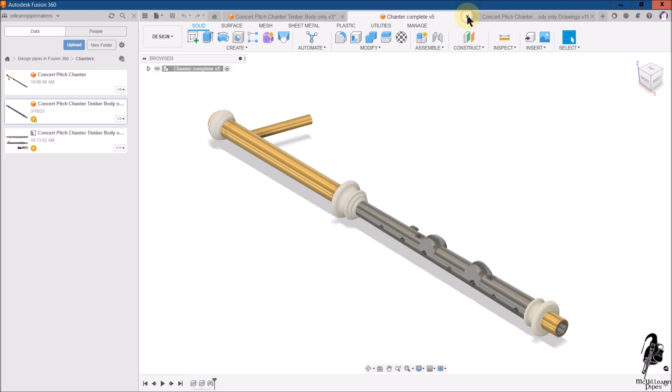So we're not actually going to work with the Wilbert Garvin data. We're going to go to open source data designed on the concert pitch Chanter in the O'Flynn Rowsome plans that are housed with the NPU, and we're going to roughly base the data on those. Here you see one of the drawings. Now the data in the O'Flynn Rowsome plans show tone holes that are not quite circular, and they show a bore which is not a straightforward conical taper, but we're going to ignore that. We're going to go with circular holes roughly based on the dimensions of the NPU plans, and we're going to work with a taper that approximates, is the best word I can use to describe it, that approximates the data as shown in the plans.

So we're going to end up with a design that looks like this. A very simple, straightforward design focusing on the timber body only. We will come back and add in the rest of the components.

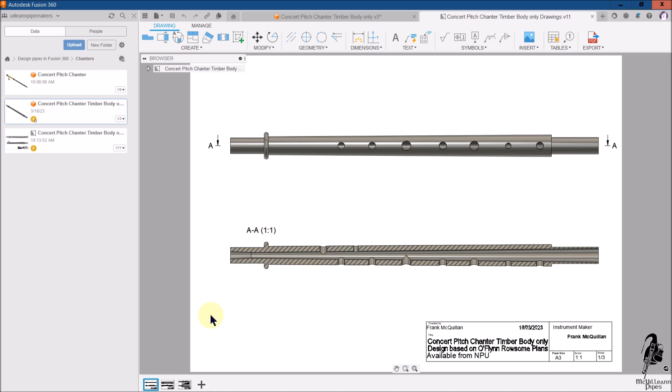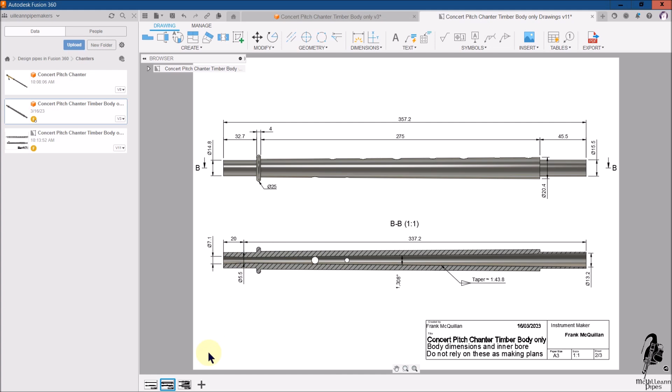And we're going to, once we have the design complete, do 3 drawings. One is just simply an overview. The second one then is, when you fit it back on the screen, the linear dimensions, showing both all the diameters and the lengths and various pieces. And we're going to show as well the inner bore and the reed seat. And finally, we're going to do a drawing showing the locations of the tone holes with respect to the bell end and the diameters of the circular tone holes.

And we're going to do 7 on the front, left hand and right hand, and we're going to do back D, and we're going to put in place a C natural on the basis that if you're making a practice chanter, it's often the habit to put in the C natural hole and plug it with a small piece of cork against future need. Okay, so with that in mind, we'll start off.

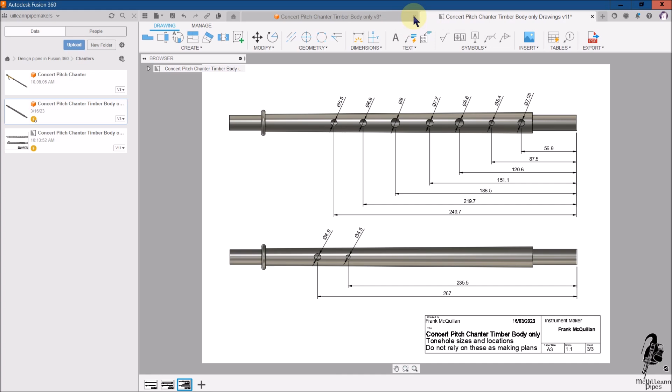So I'll just close that. We'll close that as well. And we will get the data panel out of view. So this is what you should be looking at, or something close to.

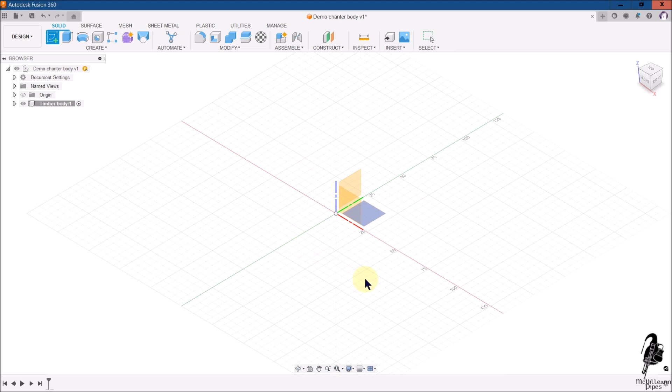Okay, so first thing we want to do now is we want to create a sketch. We want to pick our plane. So depending on where the mouse goes, one or other of the three available planes gets selected. So I'm going to select that one.

Now, if you're unsure as to what plane, just finish sketch. There's nothing in the sketch, but you can see how the sketch now is starting. There is a sketch in existence, it's just nothing in it. So I'm going to just delete it to get rid of it.

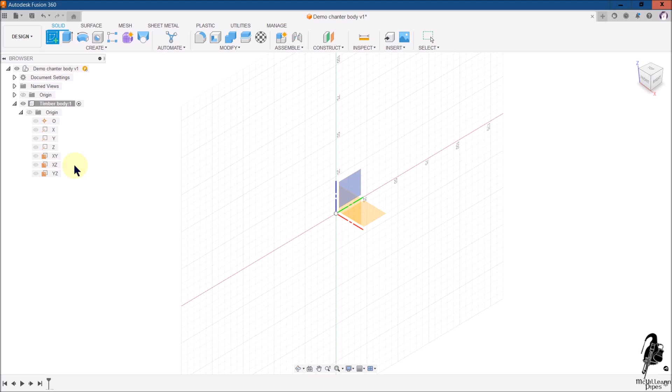And if I want now to create a sketch again, show the origin, you can see that as I highlight each one of these, the sketch becomes slightly, or the plane becomes slightly grayed in the main screen.

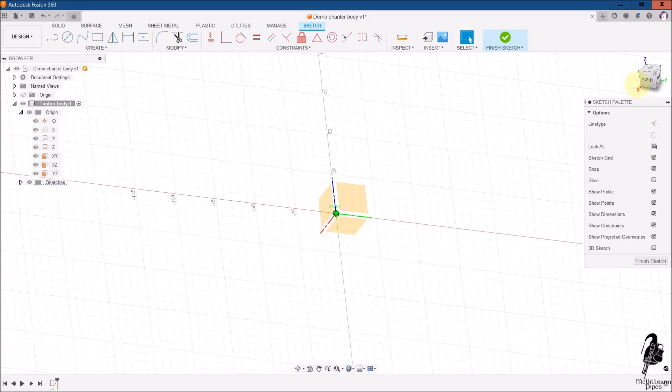So I usually go with the YZ plane. And there you have it. This thing here in the middle is what is known as the origin. You can see you have an axis there, and an axis there, and a plane there. And you can move around with the little cube in the top right hand corner.

But for the purposes of working with chanters, so much of the work we do is circular on the YZ plane and linear on the x-axis, that it's good to look at the actual workspace square on.

So we're going to build a circle. This is going to be the reed end of the chanter, the very top of the chanter that you'll bury into the cap when you start playing it. The dimensions for this is 14.8 millimeters.

So we've just created a circle. This is your sketch palette over here. Finish the sketch, and you can see the way it turns nicely.

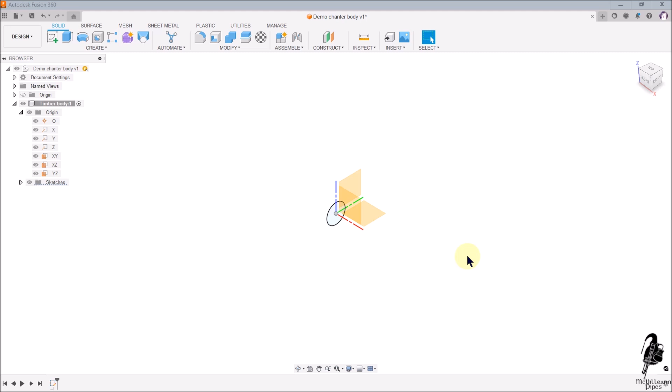So the next thing we're going to do, if you haven't met it before, is this chap here, which in the notes is create extrude. Now the shortcut key is just to hit the letter E on the keyboard, but because we have just created a circle, Fusion figures out that we want to extrude or extend that circle.

So this is going to form the neck of the chanter that's going to be buried up into the cap, and you take a view as to what length you want that to be. So you can see the numbers here. I'm going to type 25.

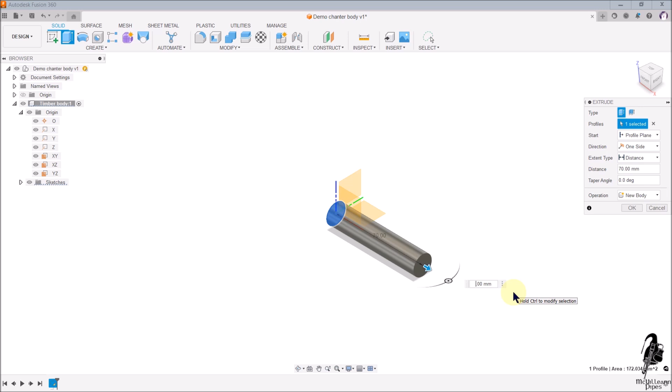I've lost focus there, so just delete that. 25 millimeters, and you can see it has shrunk back to the proper distance. It's showing the number there, and it's showing a number there.

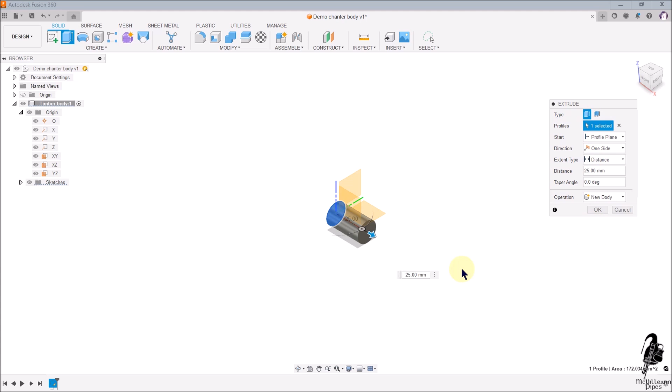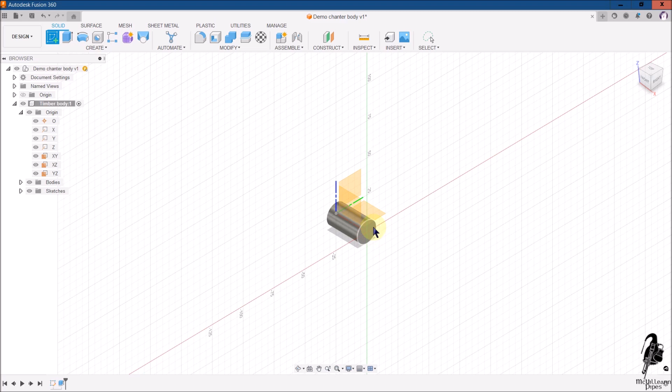Now, we want to put a little bit of a stopper, I call it, at the bottom of the neck. And we do a very simple one. Go back and we create a sketch, and we actually use this face as the construction plane. This practice can cause you trouble later on, because whatever you put onto that face, if you change the length of the extrusion, it will travel with it. So you need to be aware of that in other projects.

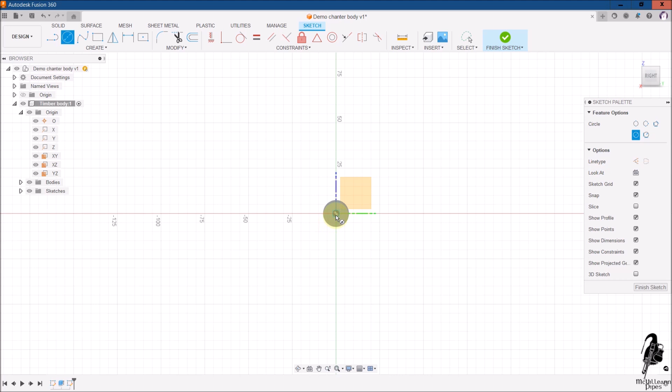We're going to go with another circle. Now make sure you get the cursor onto the center. And if you look closely, as you come towards the origin, you'll see you get a little blue square. That lets you know you're on the center.

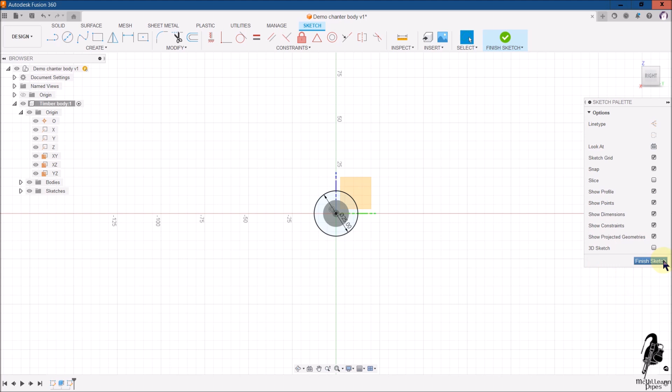What size do we want this? Well, I go with 25 because it's a round number. It's as much an aesthetic decision as an engineering decision. It's just there to give you a resting shoulder that'll stop the cap sliding down entirely over the chanter. So finish the sketch.

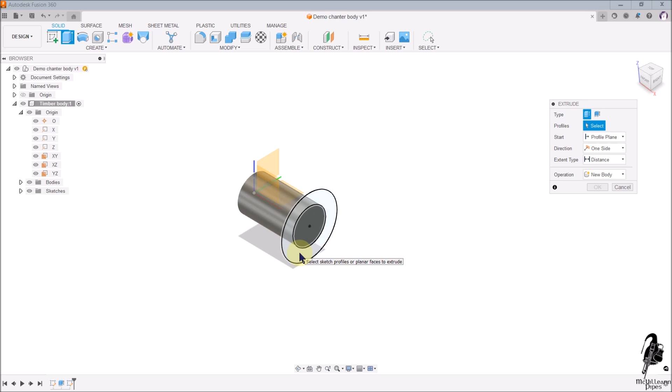Now we're going to have to give that a little bit of thickness, and we're going to use the extrude again. Now you need to be careful here, because extrude or Fusion will recognize that there's actually two profiles in there, that one and that one. So an inner circle and an outer hoop. So we want both.

Now you don't have to hold down control there. A click on one, then followed by a click on the other will give you both. And then we proceed, we want to go in that direction. Now I picked a distance of 4 millimeters for that. Not the prettiest thing in the world, but we'll come back later on and make it pretty.

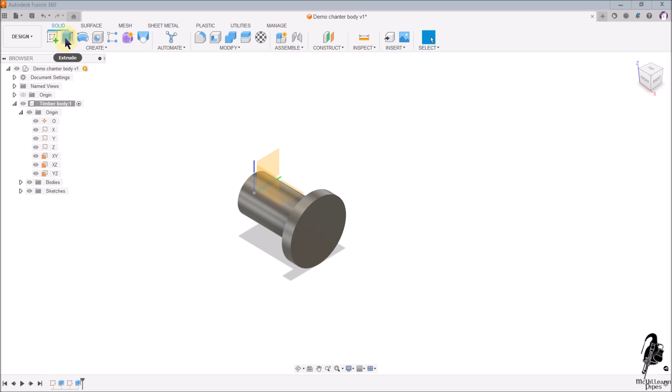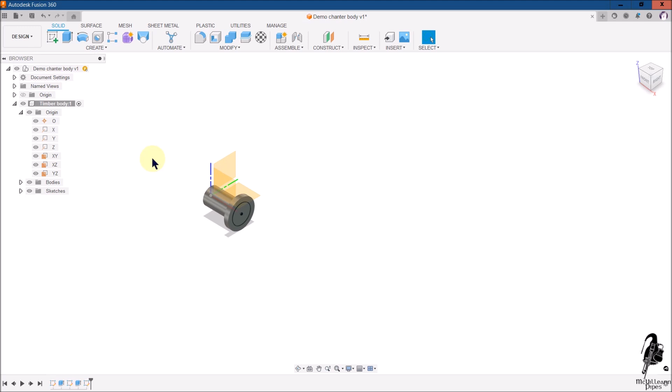Now, again, we're going to create a new sketch, and we're going to take this face as our construction plane. We'll make a new circle. Now we're going to go back and rely on the data we have from the NPU, and we're going to pick 17 millimeters for this circle. We'll finish that sketch. Now we're not going to extrude that circle.

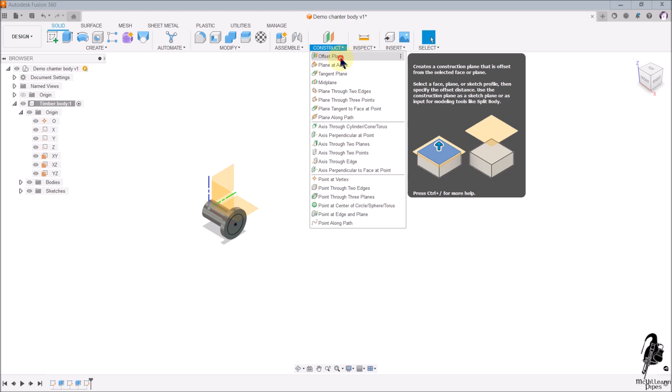We're going to do something entirely different with it. We're going to build two offset planes, and we're going to offset them off this plane here, which is the YZ plane. See the YZ on the left? That turns blue when I highlight that plane. So I'm going to construct an offset plane. I'm going to pick that plane. Now I'm going to put in another plane, which is 357.2 millimeters away from that.

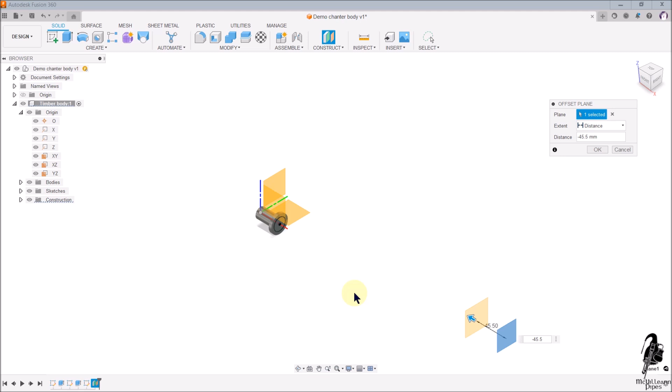And that gives us the full length of the chanter to be. That's the design length of the entire chanter. But I'm going to need another construction plane, and I'm going to use this as my offset plane. I'm going to say, right, construct an offset plane, and I'm just going to go back. This is going to give me the distance, or the point at which the external taper of the chanter ends and the reinforcing ferrule begins. So I'm going to make it 45.5. No, you'll make this mistake heaps of times as well. I left out the minus. So there it is.

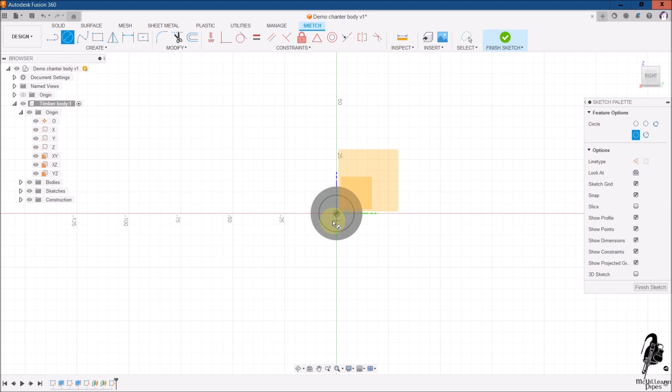So I'm going to construct now the tapered external body from that circle here to that plane there. So to do that, I need to create a sketch on that plane. Okay, so now go for the circle. It looks as if it's all going on top of itself, but it's not. This circle will actually go on that plane, which is negative 45.5 from the bell end of the chanter. It's often a good idea to make the circle real big, way bigger than it's actually going to be before you type in the numbers.

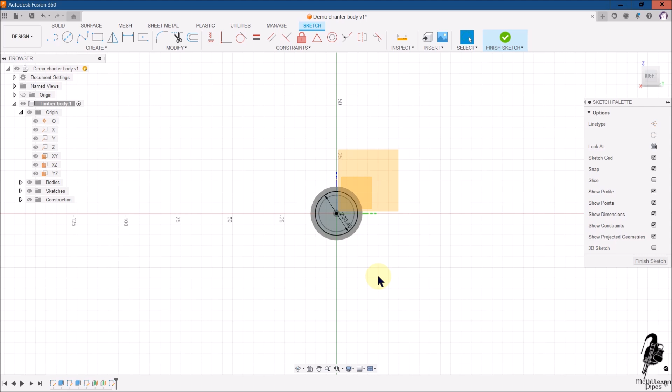And the numbers for this are 20.4. This is purely a matter of aesthetics for you. This is the external taper of the chanter. It will have some effect on the chimney depth of your final design. For the moment, 20.4 is going with the plan, and we'll finish the sketch. We'll just take a look at everything now, and you can see the way that this circle is well away now from this one. So we now need to build the body between that circle and this one.

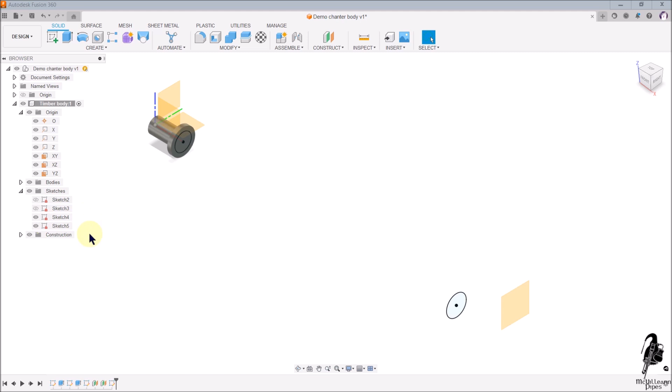And the way we do that, well, firstly, we want to make sure that those sketches are visible. You might have this situation and you can't see anything. And if they're not made visible, you can't get at them. So when you're going to do a loft, it's important to make sure that the sketches are actually visible. And we're going to create a loft.

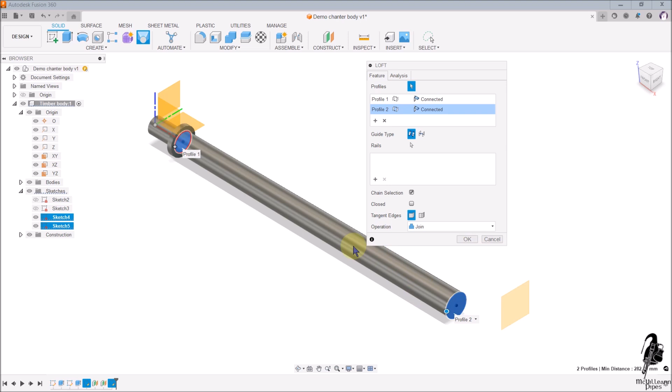And up comes the dialog box, inviting us to pick the profiles we want. That lad - so we got him. We have success, he turned blue. And we have this one. And now you have a loft created between the two. It's important to pick the operation join. There are other ones available, we will use them later on, but for this one, we want it to join. That makes this loft part of the overall body that we're building. Hit OK.

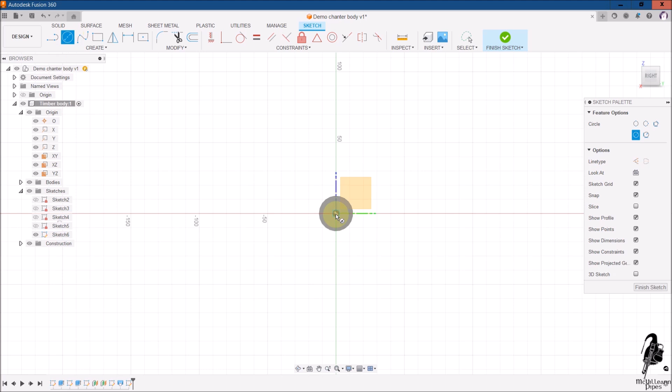So you can see the chanter starting to come together. Just move on again. Now, on this construction plane, we're going to create a circle, this time I went with 15.5, which is a little bit bigger than the NPU plan, but it leaves more material in the finished chanter, and we'll finish that sketch.

You can see we have the new circle here. Now we're going to grow this into a cylinder back to this point, and we're going to use extrude to do that. We're going to convince it to go that way. Now we know that the distance is 45.5, but we might decide to change that at a later stage, and we don't want to put a parameter in here that locks our extrusion to 45.5. So we want it to go to the object.

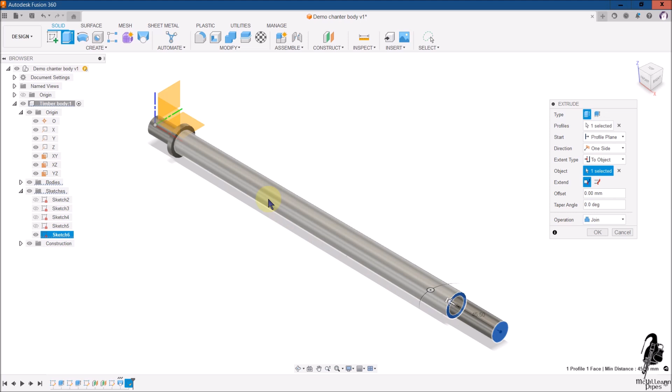And object is selected in the dialog box. The arrow is pointing away here. This is the object. Now it knows currently that it's 45.5, if you can see that on the screen. But it knows it now is bound forever, so that anytime we change where that plane is, change the length of that loft, the length of this will change as well. Save you all sorts of grief in the future.

Now you can see we have the external body. So next thing we want to do is we want to tidy up this lad here. Oh, let's just have a look at him.

Now the simplest way to tidy this chap up, there's several ways for building ornamentation in Fusion. We created a circle and we just extruded it. That gives us a cylinder, and we're going to modify that cylinder with a fillet. Now if you can't see the fillet in your icons, go to modify, it'll be down here. And likewise, if you wanted to use a quick shortcut, you can use the letter F.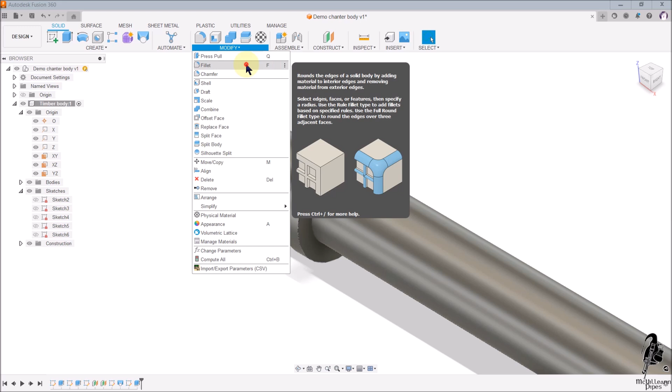We'll go with fillet. Now you don't have to do them one at a time. You can pick a wodge of them together. So we'll select that edge and we'll select that edge. Again, you don't have to hold down shift. It asks you what dimension you want. Now I'm going to break this. I'm going to call it 2.5. Oh, it did it. Shouldn't have done it. I would expect that to throw an error, but I'll just go back to 2.

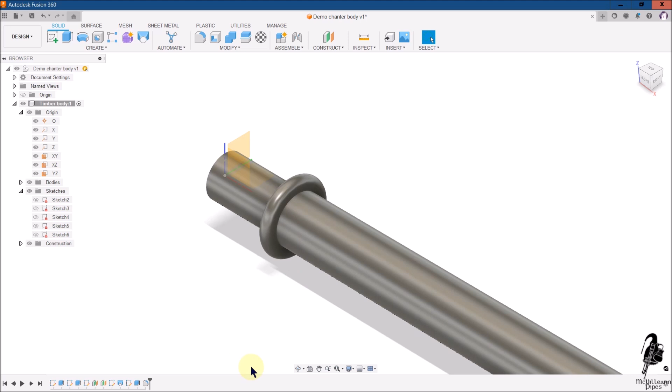Because it's 4 mil in depth, when you put in a fillet of 2, you actually turn the outside of the cylinder into a semicircle. You get a nice hoop effect. Okay, other ways for doing it, but that's a simple way for today. So where are we now? Just have a view of everything. So you've now completed the Chanter body timber solid. Now you won't get much music out of it until we do a few other things with it.

And the first thing we're going to do is we're going to put in the inner bore. Now we're going to take a very simple approach to that. We're going to put in an entry hole up here for the reed seat. We're going to put an ending circle for the reed seat, which is the narrowest point of the inner bore, and then we're going to put a circle in here at the bell end. And you can do this in any order you like.

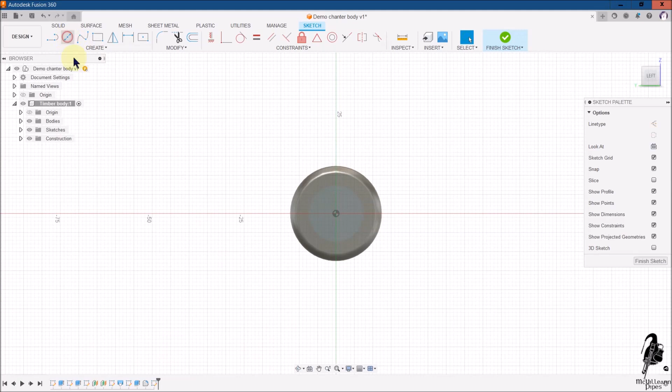I'm just going to start off now as we did it in the instructions, and I'm going to zero in here. If you don't like these things, just hide the origin. They're still available, but they're hidden for the moment. And we're going to put in a circle on that face. And that circle is going to be the opening diameter of the reed seat, and a 7.1. We finish the sketch.

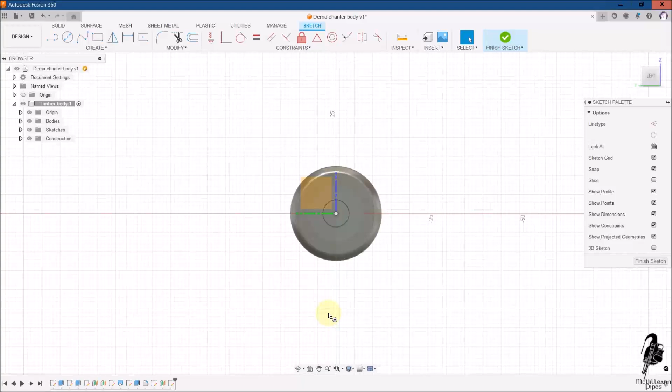I'm going to show the origins again, because I'm going to create a construction plane, an offset plane. And I'm going to make it, I think it's 20 millimeters from that. That's the depth of the reed seat. And I need that plane to create a little circle on it. So I'm going to create a sketch again. And circle, I just hit the letter C for the tool. And I think we make this chap 5.5. Let me just check on my notes. Yeah, 5.5 it is. So 5.5, and we'll finish the sketch.

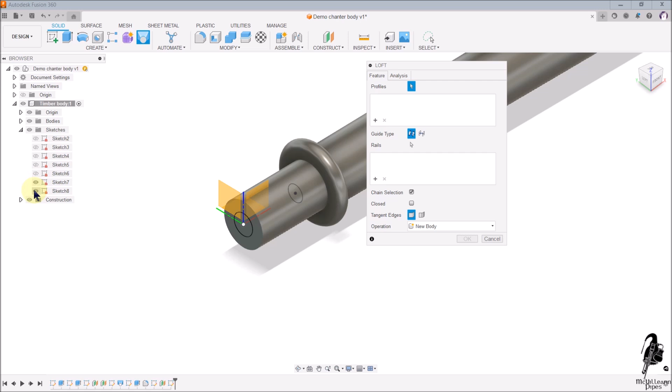I'm just moving through my notes now. Okay. Now we're going to do another loft. Now I've moved him up there because I use loft an awful lot. The way I do that is I will go to loft and get the little 3 dots there, click on that, and I have them pinned to the toolbar. Okay, so now I'm going to pick my 2 profiles. Again, if you can't see the inner sketch, make sure your sketch is visible. We pick him, we pick him.

Now you see the red showing up in the inner bore. That means that Fusion has decided that you probably want to remove or cut material. And that's what we want to do. And you can see the nice conical shape that it has. And we'll hit OK.

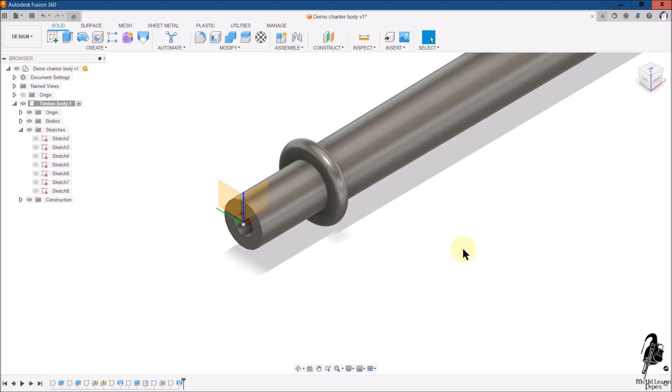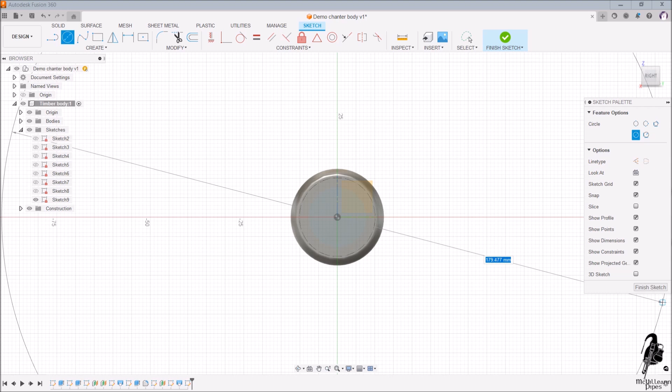Now, we'll zoom in again, and this time we'll take a look at the other end. And we want to put a circle in there. Again, making sure that the circle tool is on the center, little blue square. And I have to check the data for this one. I think it's 13 point something. Yeah, 13.2. Enter. And we'll finish the sketch.

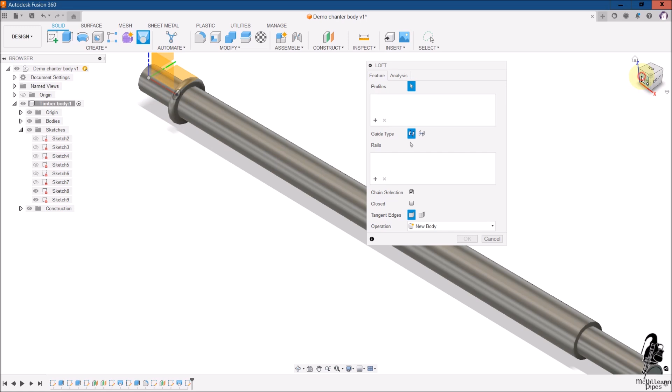And you can see that the other sketches have disappeared. The last one is still visible, but I want him. And when I hit sketch 8, now your sketch might be numbered differently depending on the order in which you did it. So I want to go loft. Now you have to be careful here. You can loft from a point as well as from a circle. You may want to zoom in so that you're sure you can select him. See, if I select that, it'll loft from that point, which will give me a very strange effect. But I want to loft from that circle to the other one.

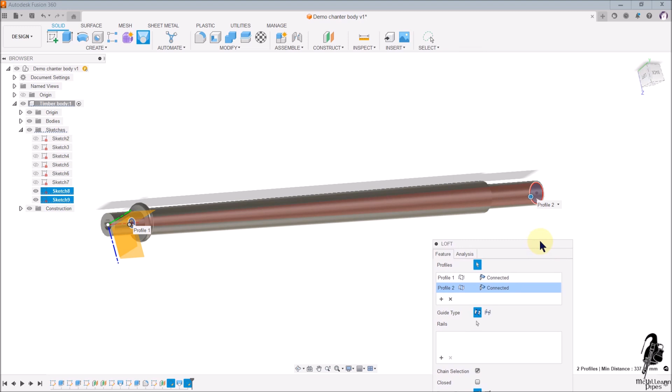Now you can see I have the lovely red cone in the heart of the Chanter. So I'll hit OK. I'm going to go home and look at front. I'm going to show you something here. You want to check that. Have we everything right? And a good place to go is to inspect. And down at the bottom you have section analysis. We want to pick a cut plane.

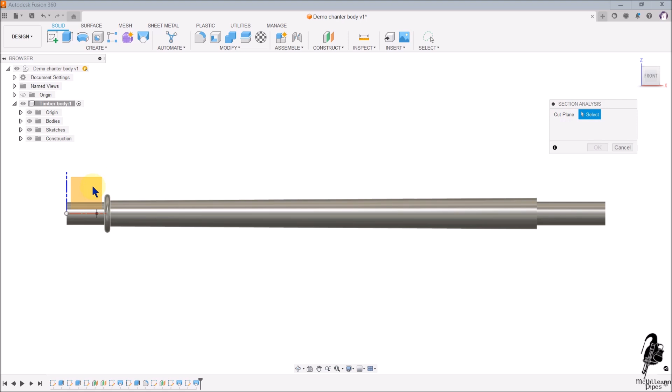Now, you see the flip? You might want to hit him to actually show the midsection. Hit OK. And now you have brought in an analysis group into the workflow.

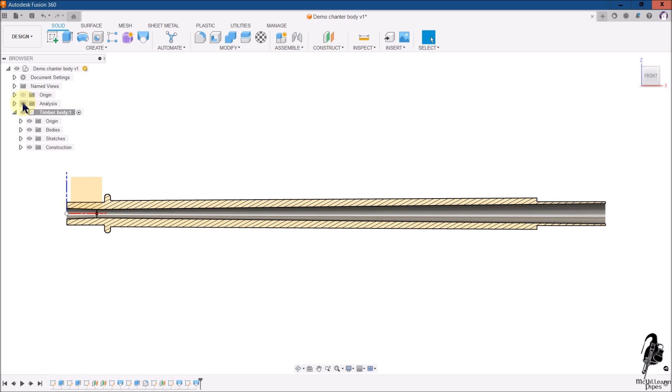You can see we have a nice reed seat and we have a nice taper all the way to the end of the chanter. And if we want to see the whole body again, we just hit that eye there. The analysis disappears, the cross section disappears, and we can go back to it at later stages to actually check on further work.

Okay, so that completes the simple inner bore with an evenly tapered air column and an evenly tapered reed seat. Doesn't resemble a whole lot the actual data as in the plans with the NPU, but fairly close.

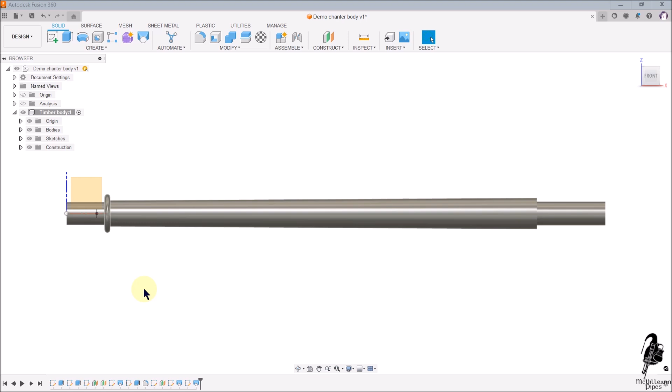So the next thing we want to do is we want to put in tone holes. Now, we just hide the sketches. So we want to put in tone holes on that plane there. So we're actually going to draw them down the center plane. I think it's the XY. Yeah, it's the XY plane.

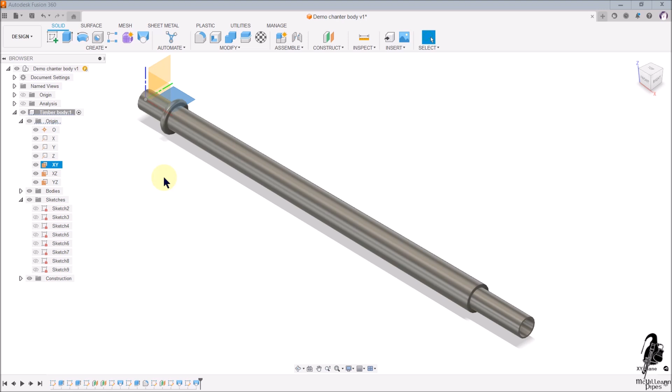So we're going to draw 1, 2, 3, 4, 5, 6, 7, 8, 9. 7 on the front and 2 on the back, tone holes. So we're going to make a sketch. Now, there are many ways for doing this. So I'll show you the first one. And put it anywhere. So we'll make this the E hole, and that's 7.05 in diameter.

There it is. It's a long way from the chanter, so we want to get it into the chanter. See that chap there? Horizontal and vertical. Pick him up, click on him, and go back to the origin. So he's now horizontal forever, locked into it with the origin.

And we want the dimension to be, so I move to the bell end and I pick up that dark line. I move the cursor up. I'm now going to set the distance, and the distance I have for him is 56.9. Okay, and he's nicely positioned.

I'm just going to pause the video now, and I'm going to put in the rest of the holes in this sketch rather than wasting your life watching me do that. But I'll just do one more so that you'll see it. The next one is 5.4. This is the E flat hole.

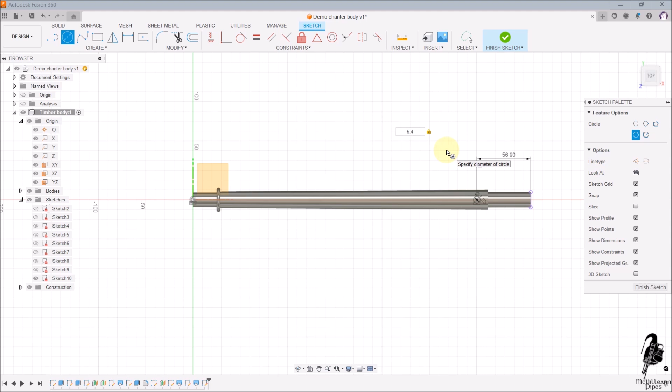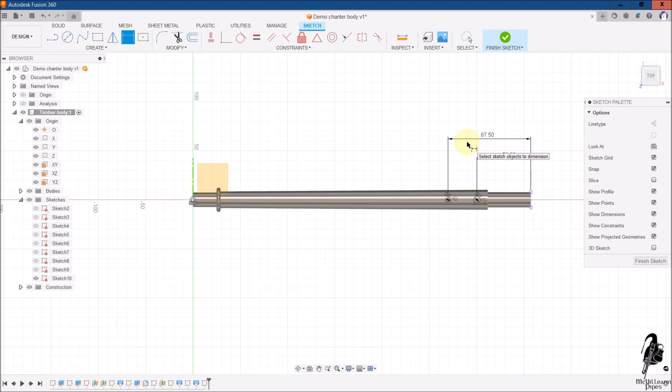And we're going to make it horizontal with the origin. And we're going to give it its dimension, which is 87.5. And there it is. Okay, going to pause now, and I'll be back with you in jig time.

Okay, so I'm back, and here I have 1, 2, 3, 4, 5, 6, 7, 8, 9. 9 perspective tone holes created on the, just escape out of that, XY plane. Okay, there's all my dimensions in, so I'll finish the sketch.

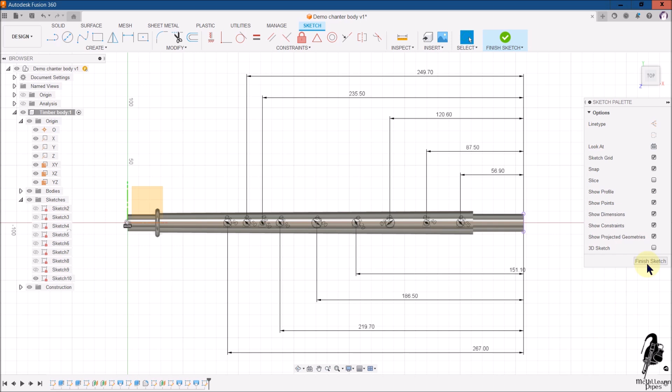Now, some of those tone holes, I want them to pierce through the front of the chanter. So to do that, now again, if you can't see them, make sure the sketch is visible. So we want to do this. Now, he's the back D. He's the C nat. So we want them to go this way.

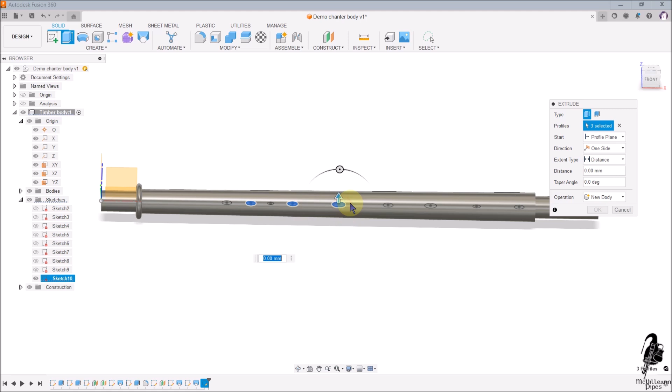These lads getting in my way. Click, hold, pull them out of the way. As I click on each circle, you can see how it turns blue. Depending on your screen size, your extrude dialog might be in your way, just haul it out of the way. So we want these to come up this way. Now that'll work, but the best way to do that is just simply to say, go through all.

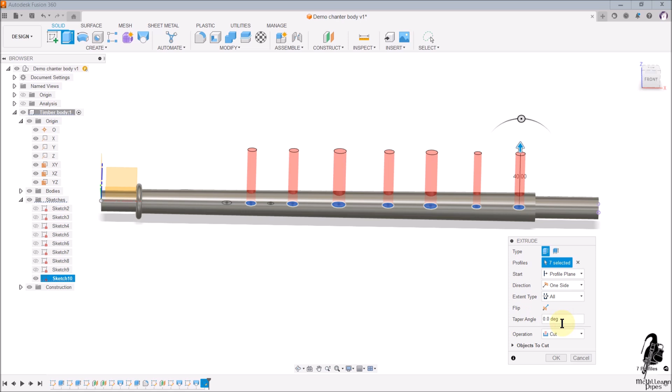We hit OK. We have the tone holes at the front. We don't have the tone holes at the back. And what happened to the other tone holes? What happened to all our little circles? The sketch is not visible. Turned itself off once the extrusion was over.

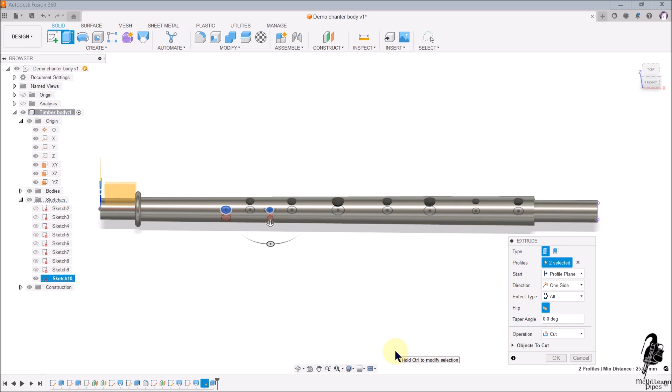We want to extrude again, but this time we want him, and we want him. We want him to go that way, and we want him to cut, not distance, but all. See, he's going the other way now. And that's okay. Now we can hide the sketch. Have a look at the front.

Now we'll turn our analysis back on. And that's what you hope to see. The even tapers, the tone holes all in position, and everything in line. Back D, C nat going out the back, and the other 7 tone holes coming out the front. Everything else waiting in place.

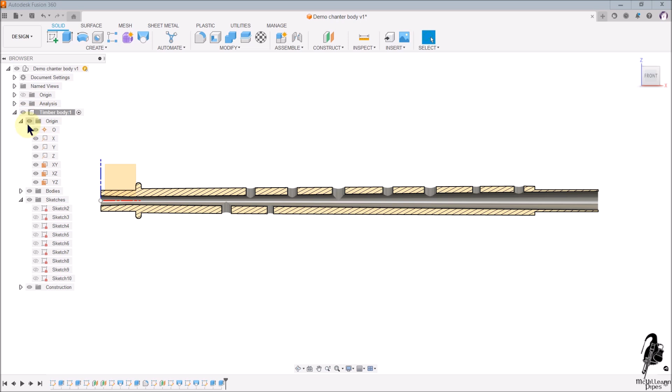Okay, I'm going to finish this video at this stage because it's long enough, and I'll come back with a separate video where we turn this chanter into a set of drawings.